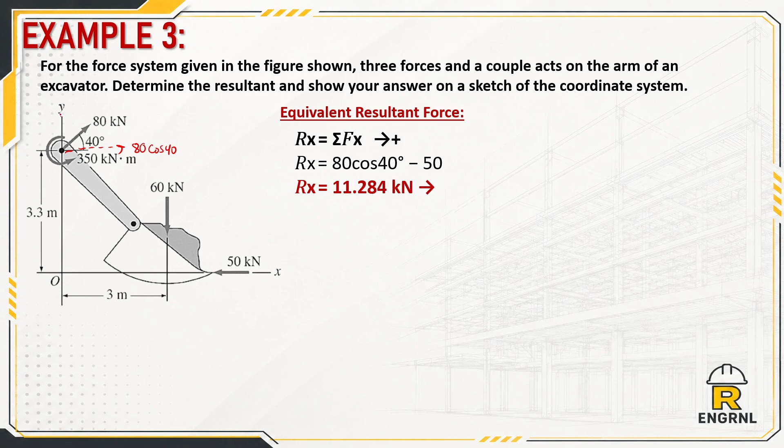Punta naman tayo sa Y. So, sa RY, ang mga RY is ito. 80 sine 40. And we have 60. Okay? So, 60. Oops, may technical tayo ha. 60 minus 80 sine 40. So, simplify, we have 8.577 going down. So, obviously, ang resultant mo ay fourth quadrant ulit. So, we have 14.174 kilonewtons.

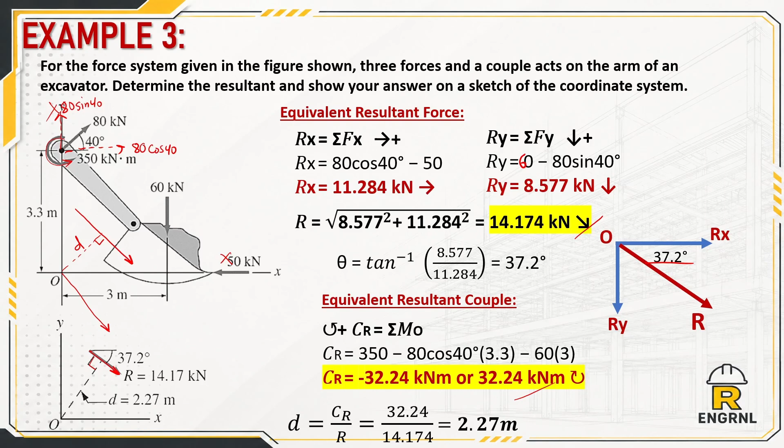Determine the resultant and show your answer on a sketch of the coordinate system y and x. So, that is example number 3. So, nasolve na natin yung tatlong procedure. Now, bibigyan kita ng panibagong sample ha, na this time, masatisfy naman natin yung procedure na to.

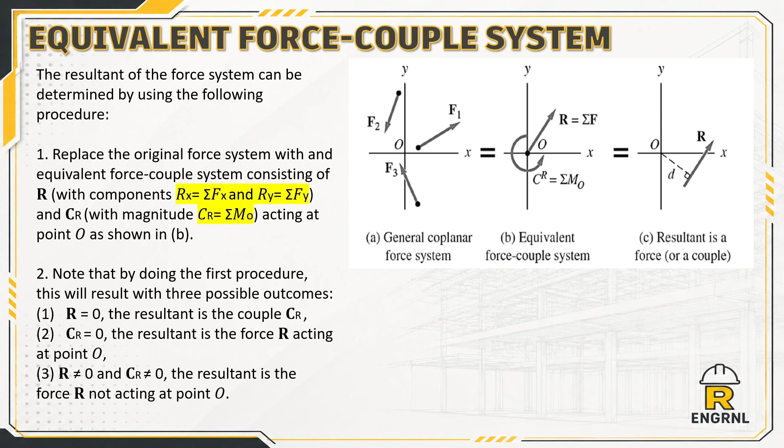So, sabi niya, kapag na-convert na natin into equivalent force couple system, titingin tayo ng mga possible outcomes. Nag-0 ba si R? Nag-0 ba si couple resultant? Tapos may mga ganito siyang mga cases. So, sa procedure 3, okay na tayo dyan. Napakita ko na sa inyo yung sample. So, paano naman kapag nag-0 si R or nag-0 si couple resultant? So, that will be shown here sa problem na to.

Hindi. Ang magbibigay sa atin ng hint is yung procedure number 2, which is 0 ba si R or 0 ba si CR? Okay. Ang unang tanong, 0 ba si CR? Hindi. Binigyan tayo ng CR, 500 pound-inch. Ngayon, walang resultant na binigay. Ibig sabihin, purely CR siya. So, our R is 0.

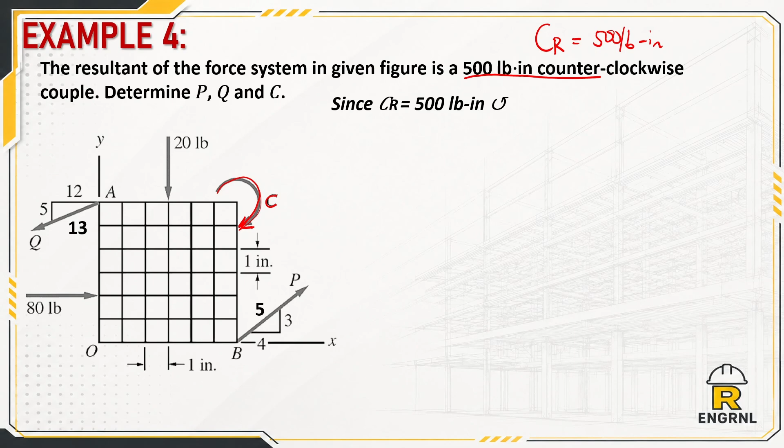So, since CR is 500 pound-inch and all these forces are depending on 500 pound-inch, therefore, your R is 0. Thus, Rx is 0. Ry is also 0. Para mag-0 si R. That is a very important hint. Okay, that's the clue. Ibig sabihin, kapag nag-take tayo ng resultant sa x, lahat yun equals 0. At kapag nag-take tayo ng resultant sa y, lahat yun ay 0.

So, therefore, we have 2 unknowns, 2 equations also. We have 2 equations. 2 unknowns, 2 equations. Ang magiging unknown mo kasi sa Rx and Ry is yung P and your Q.

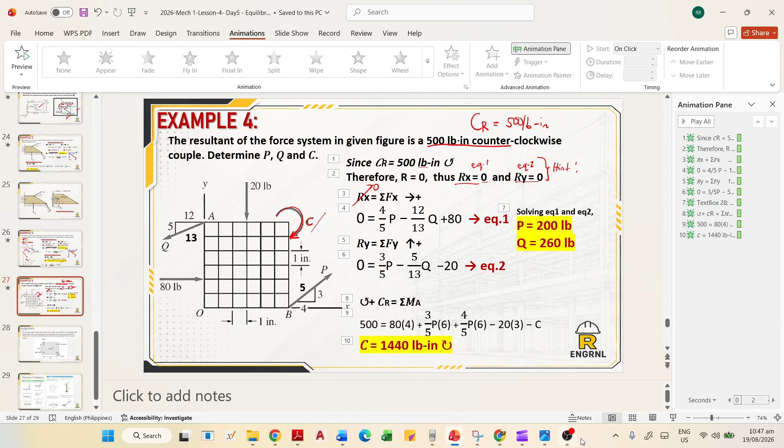Since Rx is 0, so 0 is equal to, ano yung mga x component ng mga force? So, actually, hindi ko nailagay dito si 80. Pasensya na dun. So, dapat po may plus 80. So, okay. Tuloy natin. So, going to the right is positive sa akin, no?

So, unahin ko ngayon si x component ni P, which is 4 over 5 P. Next, yung Q. The horizontal component of Q is 12 over 13 Q. That is going to the left, so minus. Then last is your 80. Positive, so positive 80. That is equation number 1.

So, let's go with the Ry. Going up is positive. Umpisahan natin ulit sa P. This time, 3P over 5. Then, going down si Q, Y component, 5 over 13 Q. Minus po yun. So, minus 20 pa, dahil dito sa 20. Okay, so we have two equations, two unknowns.

So, we have two equations, two unknowns. Bakit ko nilipat? Kasi may ituturo ako sa inyong mode sa calculator, para mapabilis tayo sa pagkuha ng two unknowns na may two equations. Pwede natin gawin to. Mode 5, then 1. Ulitin ko. Mode 5, equation, 1. This is the pattern.

Unknown x, unknown y. The value of a is constant a. Kung ito yung x, yung P is x, ang a ko is 4 over 5. Now, kung y ko is Q, ang constant b is negative 12 over 13. Yan yung pattern mo. Now, yung Cn is the constant value outside the equal sign. Ano ba yung outside the equal sign ko dito? Negative 80. Kaya ko siya nilabas. So, let's go with equation 1.

So, I will input the value for x, 4 over 5. Then, negative 12 over 13. Sundan nyo lang yung pattern. And then, we have C, negative 80.